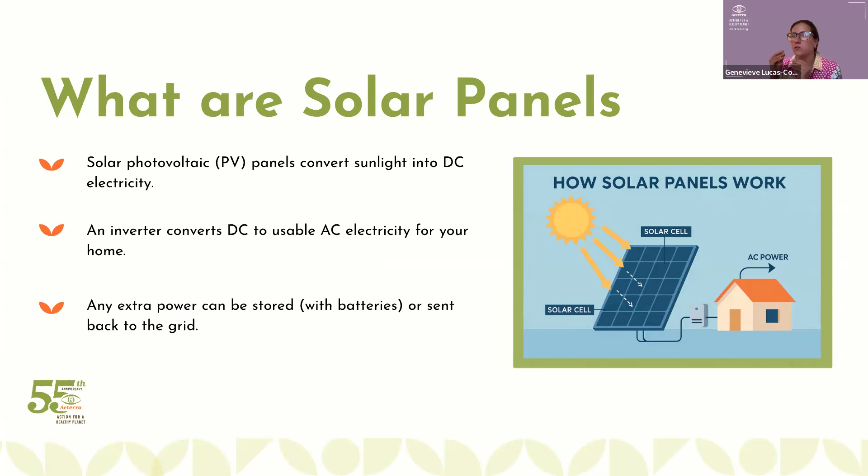So what are solar panels and how do they work? Solar panels are made up of smaller units called solar cells. Usually they're made from silicon. When sunlight hits those cells, it creates an electrical current. That's called the photovoltaic effect, PV.

This electricity comes out as a direct current, DC, but your home uses alternating current, AC. So an inverter steps in to convert it. You'll see this little inverter here. Once it's in its AC form, that clean energy powers your home just like utility electricity would. And if you generate more power than you use, that extra energy can go into a battery for later, or back into the electric grid, earning credits, which Indra will talk about at the end.

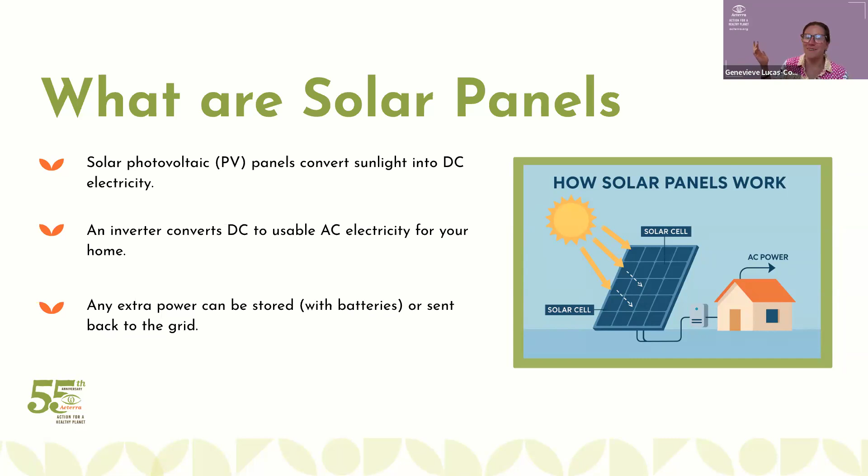So is solar right for you? How do you know if solar is the right fit for your home? Start by asking, does your roof get a lot of sun during the day? South and west, south facing and unshaded is ideal. Thinking about your energy usage as well is a big factor. The higher it is, the more you could potentially save.

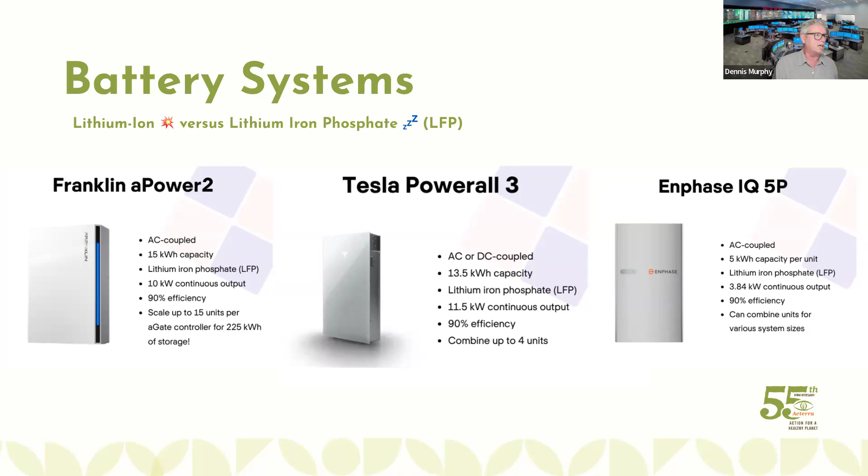So the battery packs here are all LFP, lithium iron phosphate. They all have about similar efficiencies. There's some different things about the controls and capacity - some are 15 kilowatt hour capacity, 13.5, and actually even down to 5 kilowatt hour capacity. They're different prices, but there's becoming a maturing battery storage market.

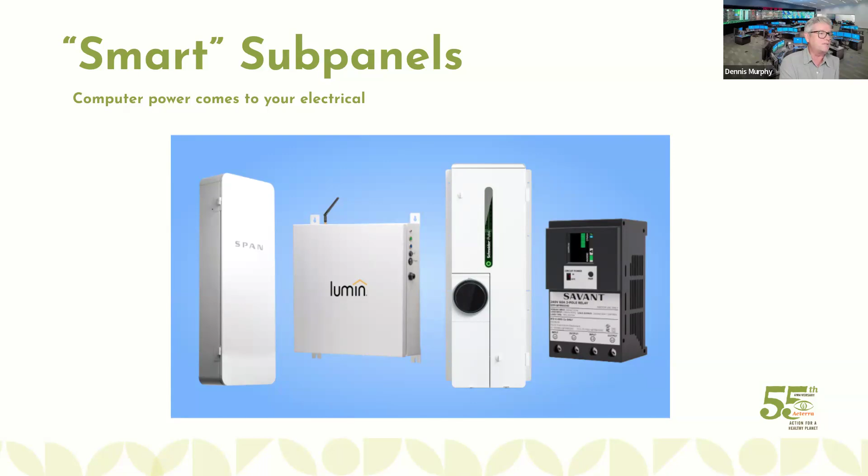Same thing with smart subpanels - we could do a whole hour on smart subpanels. Basically, the idea is what used to be dumb subpanels is now getting computerized, and that gives you a ton of possibilities in terms of EV charging, load management, and all kinds of things, which you would operate from your phone. So that's an exciting prospect ahead.

Switch Is On is another really good source of information, and also for contractor research. Energy Sage, at energysage.com, is another good site and search tool as well. As for a Yelp for solar, Yelp itself is good for specific contractor opinions, and Nextdoor might be too - it's not just for food and complaining about things.

And then of course there's the contractor license lookup, the CSLB, or Contractor State License Board. There are definite rules with contractors - I believe by California law the maximum deposit a contractor can expect is $1,000, not the whole job paid up front, to make sure they perform.

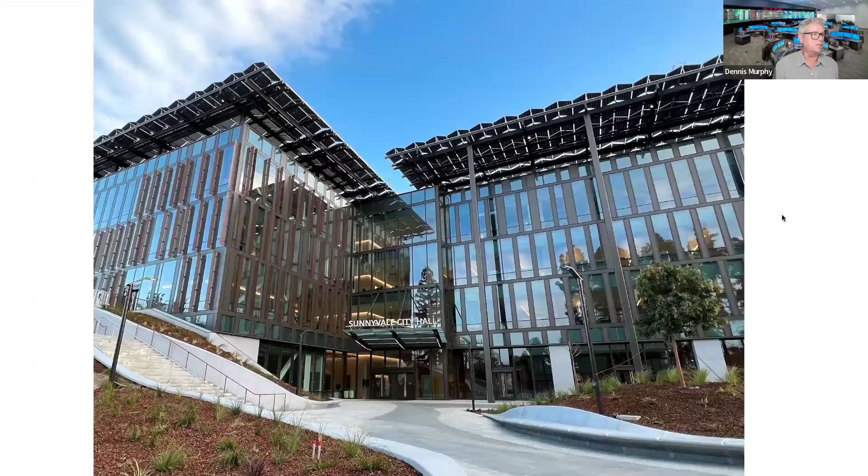Switching away from being Dennis Downer with gloom and doom, I wanted to give some good news, and it's a local story - your city hall, your fair city. So next, you have a new city hall - oh, go back one please.

This is the front of the building. It's in a late phase, at least of exterior construction. As you can see, there's this exoskeleton of solar panels, which is pretty amazing - they basically built City Hall around this.

There are 1,600 panels, and some of them are bifacial, meaning they can produce energy on both sides of the panels. They use that where it's useful to capture reflected light underneath the panels as well. 1,600 solar panels is pretty amazing, and they generate a lot of power - a million kilowatt hours annually.

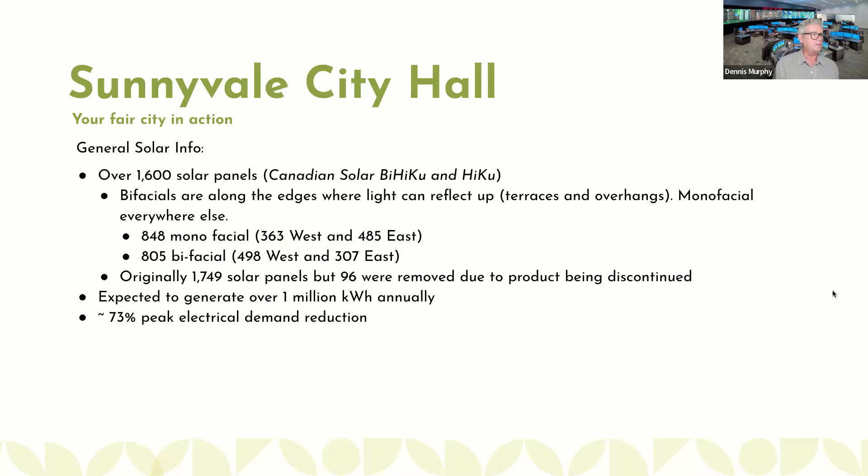There are a lot of statistics about that, but they also have battery storage - 330 kilowatt hours worth, which is designed for 3 hours of whole-building function, probably in the afternoon as they cultivate power during the day. That will probably be an expansion issue as well.

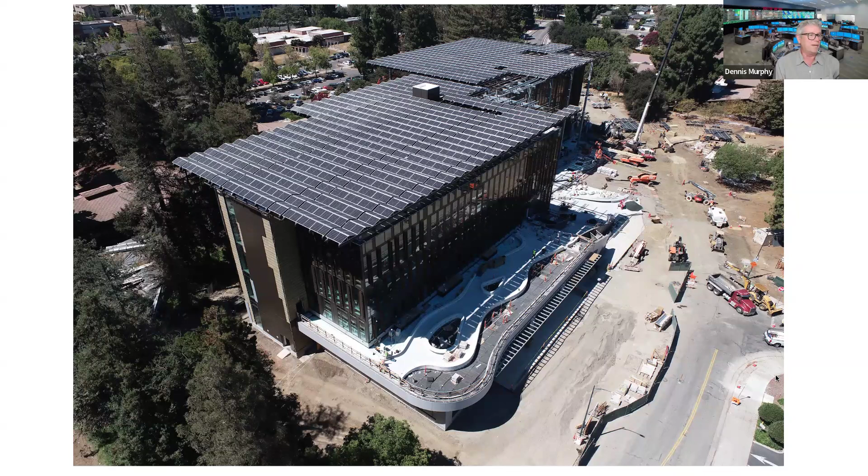These are just pictures - here's a drone picture of the top, so you can see the amazing roof of this building. Some construction pictures, and underneath you can see some of the bifacial panels as well.

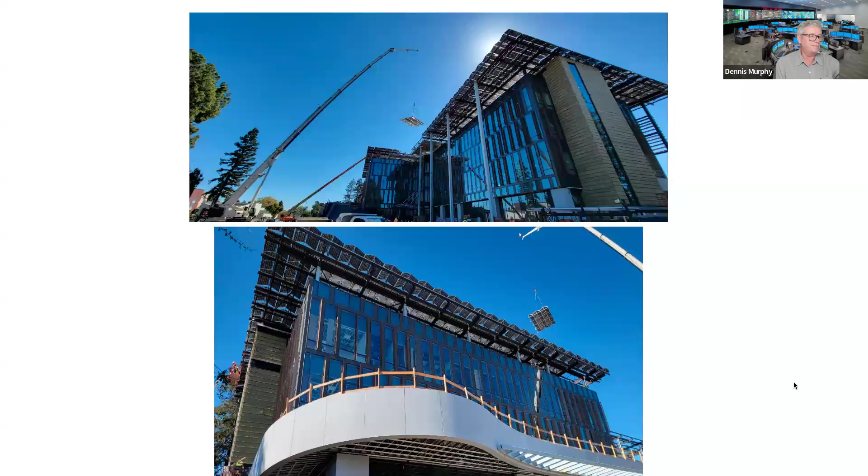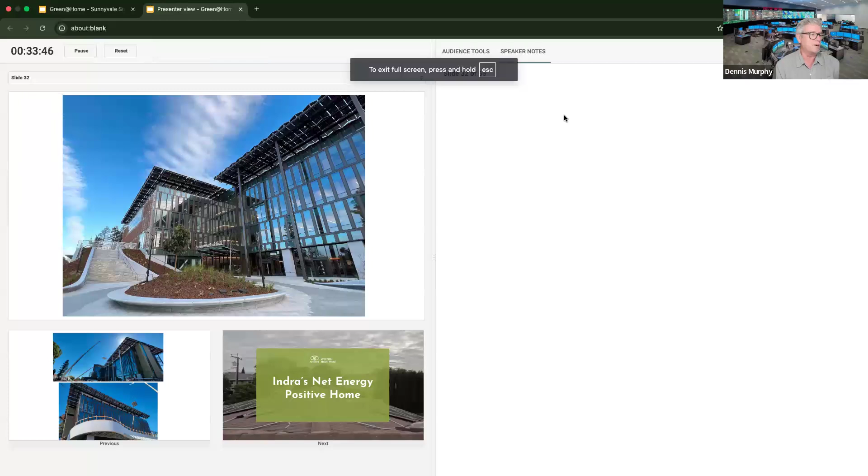Just some other views - this is going to be a great grand opening. I was at the San Mateo County building in Redwood City, which was the biggest timber frame building in the country as well. This is another shot of the front. And with that, I will turn it over to Indra.

Thank you, Dennis. That was a great presentation about the current situation. I am now going to talk about a success story - that's my home, which I call the net energy positive home, or the energy plus household.

The idea is that it's basically a standard home - a single family house, about 2,200 square feet, located in Cupertino currently. It has 2 adults and 2 kids, which is kind of average. It had 2 commuting cars with 2 working adults, using the cars for weekend chores, visits to nearby family and friends, entertainment, and so on.

The unique feature is that this household has had zero energy bills for the last 15 years. In fact, it has negative bills - the utility company, Silicon Valley Clean Energy, gives me a check at the end of each year. It has zero electricity bills, zero natural gas bills, and zero gas bills in daily life - completely sustainable and carbon free with renewable energy.

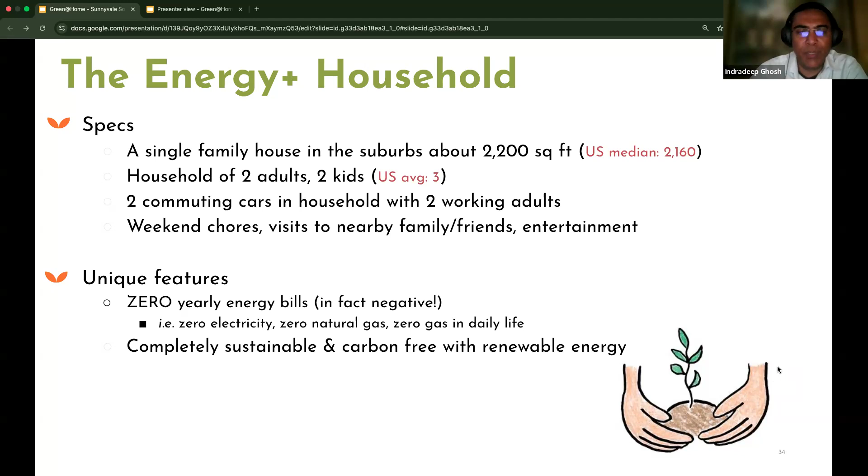The primary reason I did this project was that I was motivated by the movie An Inconvenient Truth by Al Gore, so I wanted to create a sustainable, carbon neutral household. I found that 90% of the direct carbon footprint is fossil fuel based energy consumption in the home. So the steps were to create a net zero energy household, eliminate fossil fuel use, and use renewable energy for day-to-day use. As a byproduct, I of course got energy cost savings, which I'll share shortly.

So this was the plan.

So if you can see on the top, these are the 3 different forms of energy we use in daily life: gasoline in red, natural gas in orange, and electricity in yellow. All of these you can convert to kilowatt hours using a conversion the EPA has given us. I was consuming about 50,000 kilowatt hours every year. So the idea first was to use efficiency to reduce all those consumptions, then electrify the home to eliminate natural gas, then electrify the cars to eliminate the gas, and finally offset all that to renewable energy.

As you can see, all these electrical appliances are highly efficient. They're much more efficient than their gasoline or natural gas counterparts, which waste a lot of energy as heat. So we ended up using much less energy than before.

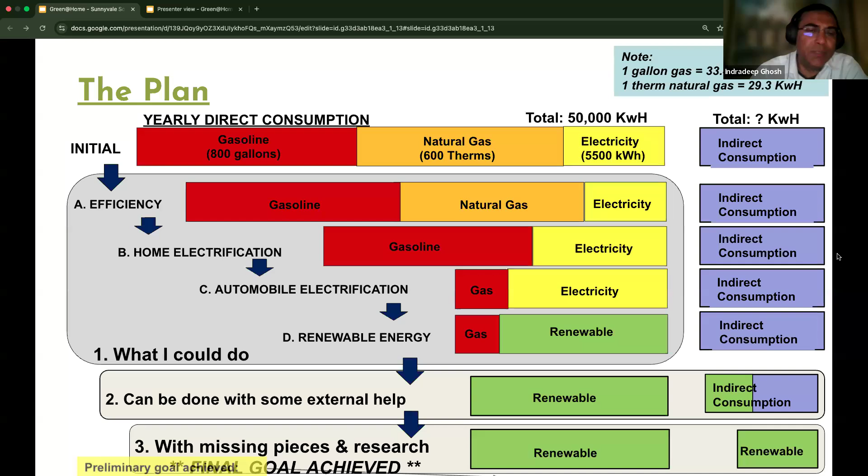So the first step was to reduce the electricity consumption. First, you can do this by simple behavioral changes that don't need much investment.

You can switch off lights, switch off appliances, use full loads in dishwashers and washer dryers, use a clothesline if you can in the summer, and set your thermostat to a comfortable but not too high or too low temperature for heating and cooling, and you will be saving some energy. You can use low flow faucets and shower heads, which conserve not only water but also hot water, which conserves energy. And you can wash in cold water with high efficiency detergent and so on. So those were some things you can do mostly without much change, and it will reduce some energy consumption.

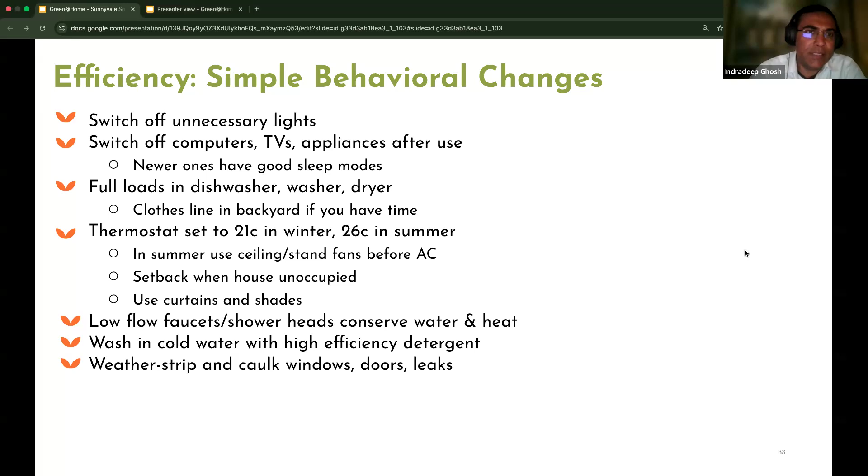And then you can do a small amount of investment, like changing your light bulbs to LEDs, which most of us have mostly done already.

Put in Energy Star appliances at the end of life of every appliance. Reduce plug load—this is an important thing most people don't realize: all these electronics and computers leach power even when they're not on or in standby mode. You can use a set of switches or smart strips to reduce that leaching power a lot, which reduces your plug load—wasted power 365 days, 24 hours every day. So that's important.

And then you can put insulation in your attic, walls, and floor, which would reduce your HVAC usage. Use a smart thermostat, and I could actually reduce my total electricity consumption by about 30% using these steps.

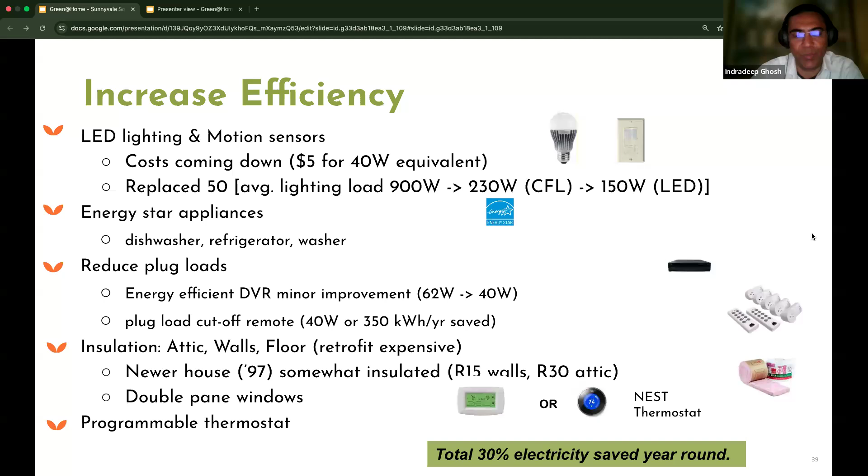So the next step was to eliminate natural gas use, and this consists of 4 steps. The first step was water heating. I had a natural gas water heater and replaced it with a heat pump water heater. These are much more efficient and go in exactly where the natural gas water heater is. They just convert all the natural gas used for water heating into electric use.

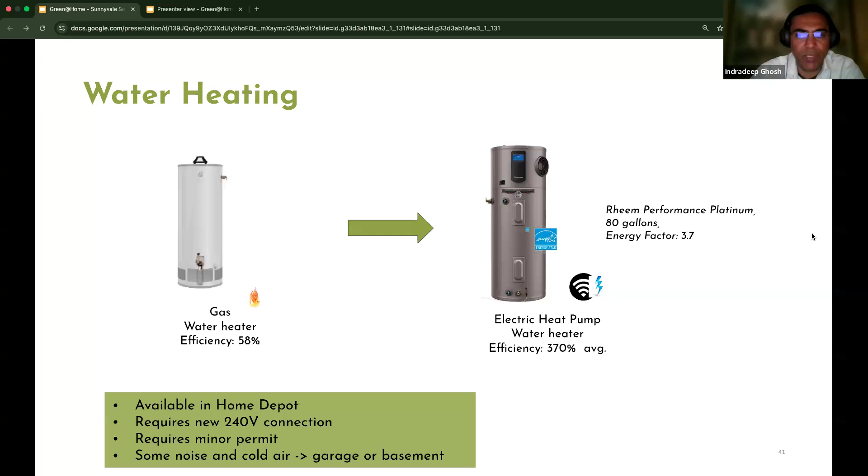Then I also converted my gas furnace, which was heating my HVAC, into a heat pump. A heat pump is almost like an air conditioning unit that cools, but in addition it can reverse the flow of heat from outside to inside, acting as a heater during the winter months. This is a little more involved and costs a bit more, but with that you can convert your gas usage for HVAC into electricity.

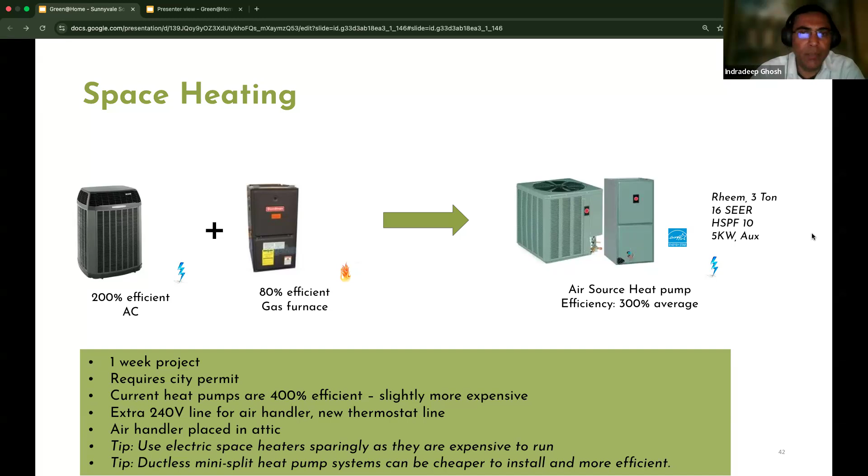That's the second part. And then, if you have a gas dryer, it's quite easy to switch it to an electric dryer—no problem there, it converts everything to electricity.

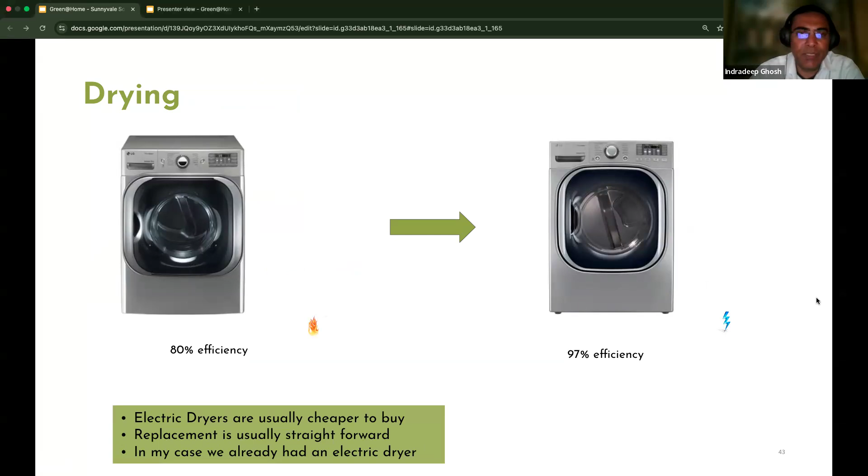And then the final step was the induction cooktop. I had a gas cooking range and converted that to an induction cooktop, which is a very efficient way of cooking—it has 85% efficiency. That completed the elimination of natural gas in the house. The house became all electric, and I could save 66% of the energy I was using for natural gas once I started using electrical appliances.

Okay, so I asked PG&E at that point.

This was 2010 that I did this, to switch off the natural gas from my house, and it was quite a shock to that person over there, because nobody had done that at that point in time. They had the idea that this would cost a lot more money to do everything in electricity, and I said I had a plan.

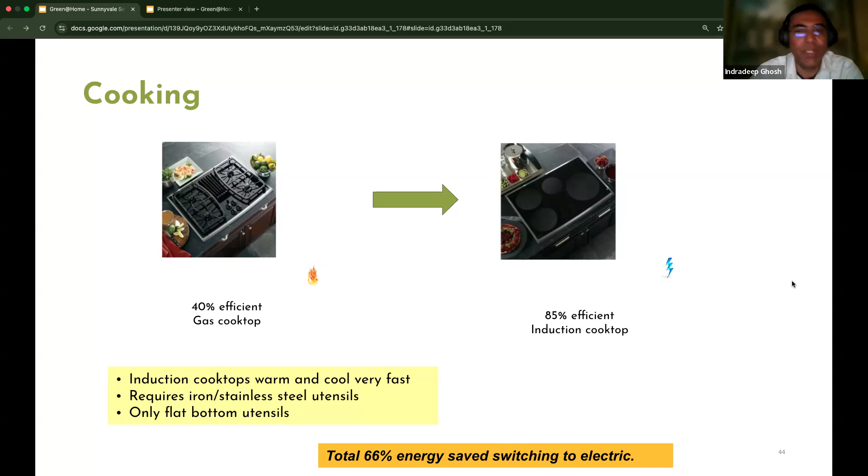And the plan was, of course, to generate my own energy. In the process, I also converted my cars to electric cars. But since we're talking about the house here, I won't go into details of that.

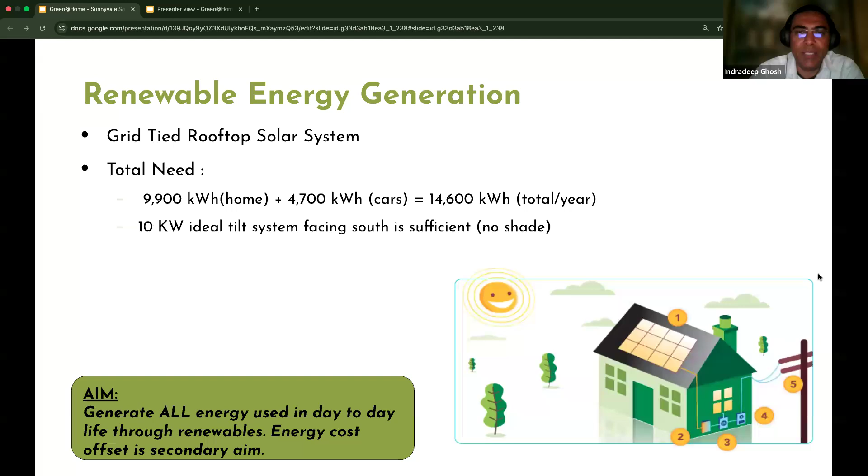So step 4 was to generate my own energy using a solar system. I decided on this grid-tied rooftop solar system. I figured out how much the house was consuming, how much the cars were consuming, and found that a 10 kilowatt system would be sufficient to generate all the energy I was using within the year.

So I implemented this in 2011. It was slightly oversized, a 12 kilowatt system with about 40 panels, monocrystalline Canadian solar modules, 11.4 kilowatt with a central inverter. The expected output was 16,400 kilowatt hours per year, which is a little higher than the 14,600 estimated for my cars and my house.

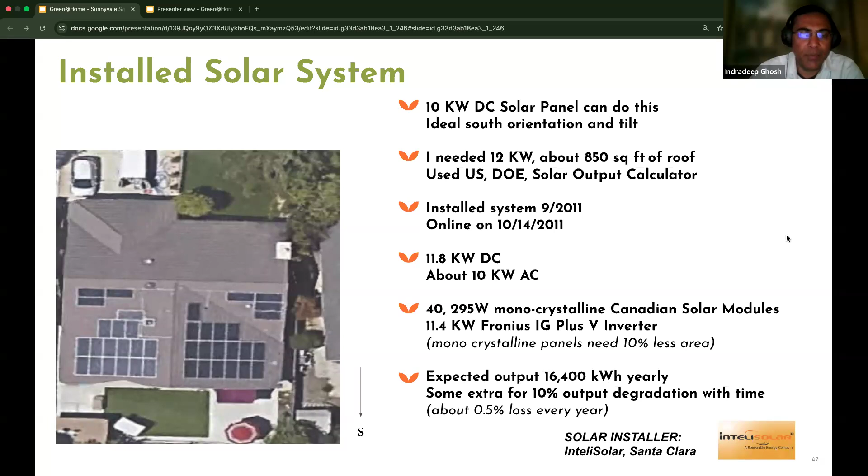So what were the results? At the end of the first year, I had generated about 4,000 kilowatt hours excess than I consumed. So I had a negative bill of around $1,200, and that was because I didn't have the electric cars for the whole year that year.

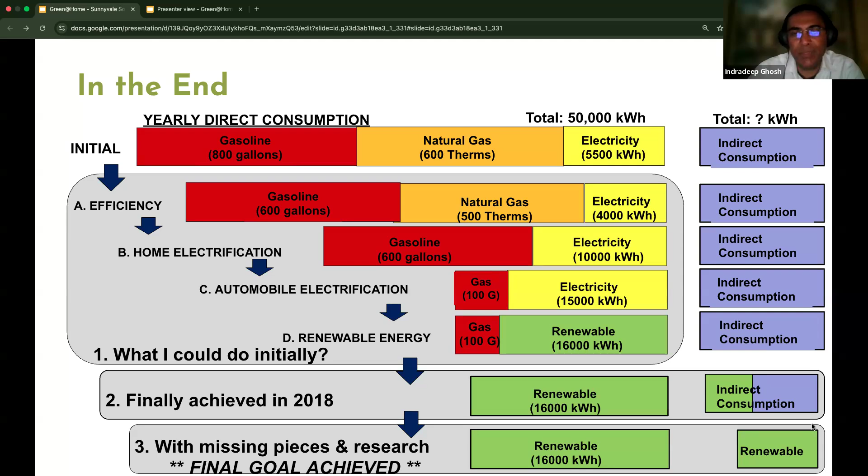And finances—how much did I spend during this whole process? So in 2013, of course now prices will be a little bit higher, the total cost was about $71,000 for this whole thing.

Changing the cars, retrofitting the home, using the solar. But then I got rebates for all those processes, which reduced the cost to around $36,000. And there are no electricity bills and gasoline bills every year, which saved me about $4,000 to $5,000 per year. So it paid back everything in 8 years.

And since then, I have been kind of free—I've been using free energy. And if you calculate a rate of return, it is about 10%.

So now the problem is that this NEM 1.0 has gone away. PG&E and Silicon Valley Clean Energy used to give me 1 kilowatt hour for 1 kilowatt hour credit. That's no longer possible in NEM 3.0. So I decided to create—next slide please—the Energy Plus Household version 2.0.

This is the house that I am building in Sunnyvale. The idea is that it will run 24 hours a day, 365 days a year, on solar and battery only, including all cars, and not take anything from the grid. So it will be completely self-sufficient in energy. Only excess solar energy during summer will be fed back to the grid.